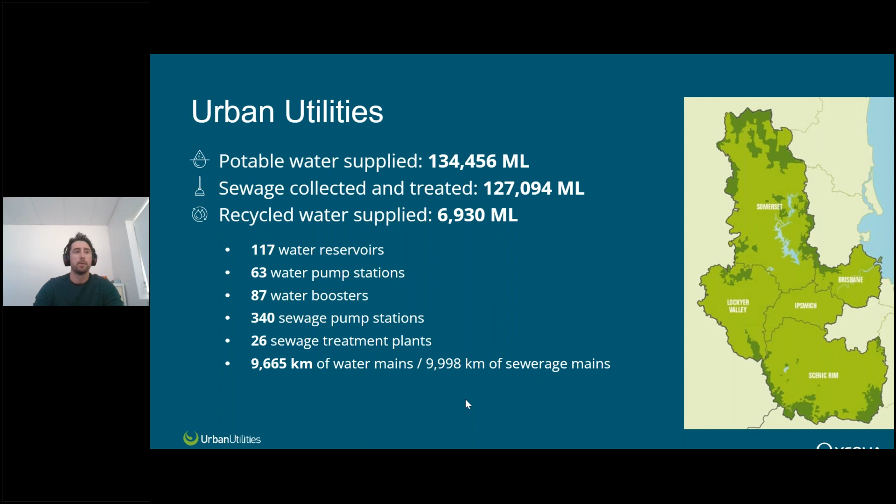As mentioned, with these increased pressures on wastewater utilities to accommodate population growth, there's also always a pursuit of lower nutrient targets to improve our waterways. Therefore, it's better to understand the social and economic impacts that these drivers really have on our customers.

Whilst there are various options to improve effluent targets through capital and operational investments, most of these traditional upgrades really do conflict with the strategy of sustainable treatment due to the increased cost to the customer. So urban utilities has taken the strides to invest and look at alternative strategies, and the one we're speaking about today is AnammoX, which is fantastic.

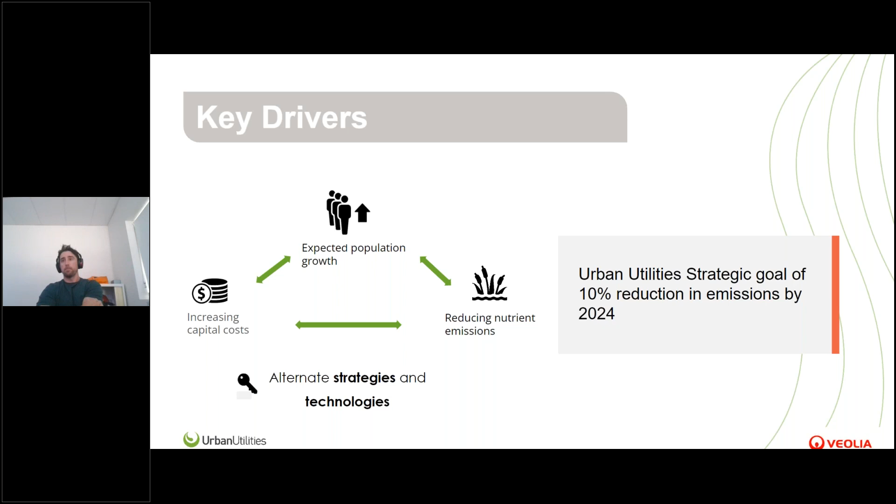Whilst the implementation of the bubble license presents both a risk and an opportunity to achieve greater emission reduction by shifting attention from smaller plants to larger plants, this obviously has a cost benefit with economies of scale. It also does provide a bit of risk.

For example, Luggage Point being such a large plant and contributing such a large amount to the bubble license mass load to the bay, a change of 1 milligram per litre in the TN from that plant is effectively equivalent to about 50 tonnes of nitrogen per year, which is pretty substantial.

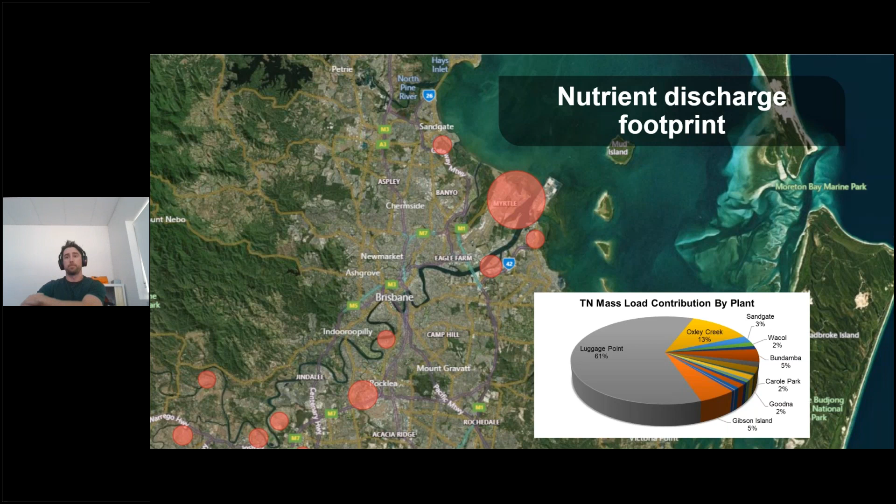This is essentially why urban utilities has focused a lot on this large treatment plant, Luggage Point. It's expected that the population will increase quite substantially. Interestingly, there has been a bit of a bump with COVID, with shifting population and changes in industrial loads to the plant, which is important because you have to become flexible within your treatment options to deal with these kinds of changes.

While there's projected growth, we've done a lot for continual improvement to provide better effluent. A lot of this work ends up becoming diminishing returns—the more you invest, the smaller the change that occurs at the treatment plant. As mentioned, whilst there are options to meet effluent targets through capital and operational investments, most of these options do conflict with our strategy of sustainable treatment, which has that almost certain increase to the customer.

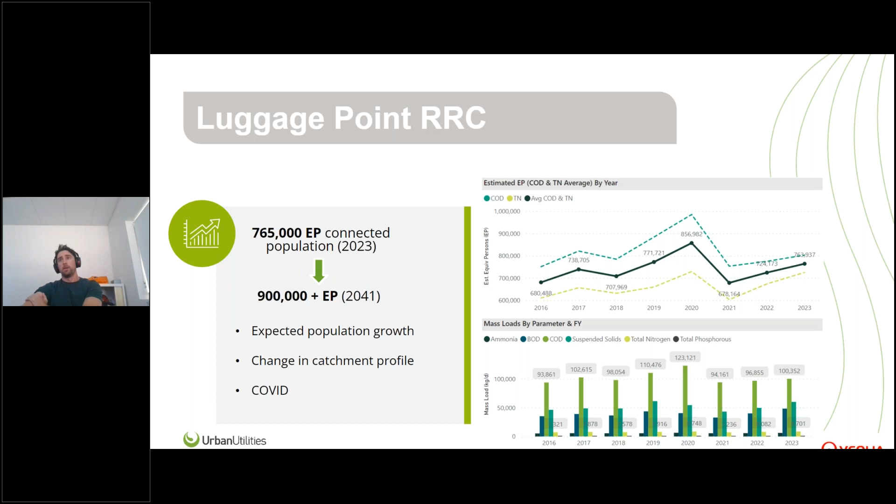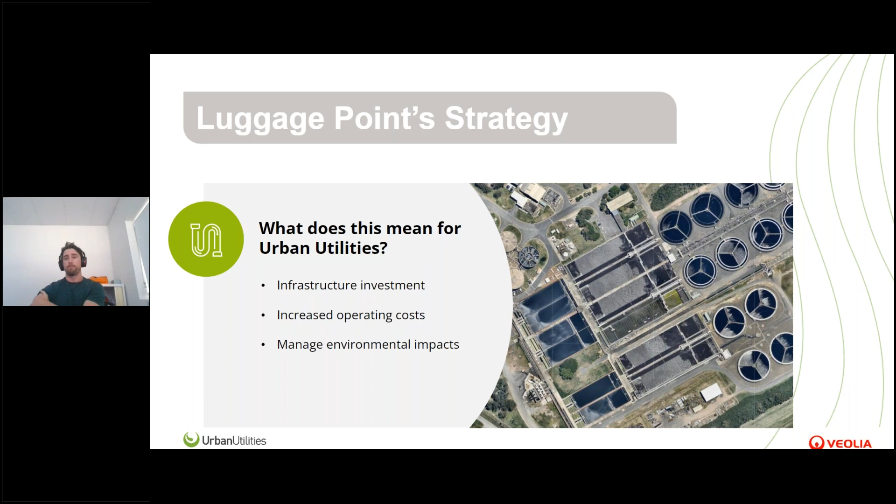So what this means for us is we ultimately have to invest in infrastructure or increase operating costs to manage these environmental impacts.

Just a bit of history, or a summary on Luggage Point: it's our largest treatment plant. We have 6 anaerobic digesters where we redirect carbon towards our digesters. Whilst this provides a lot of benefit in terms of renewable energy on site, it does provide a lot of load back to the head of the plant, equivalent to about 12 to 15% of the plant's return, which means this contributes to a lot of the ethanol, chemical, and air usage within the plant.

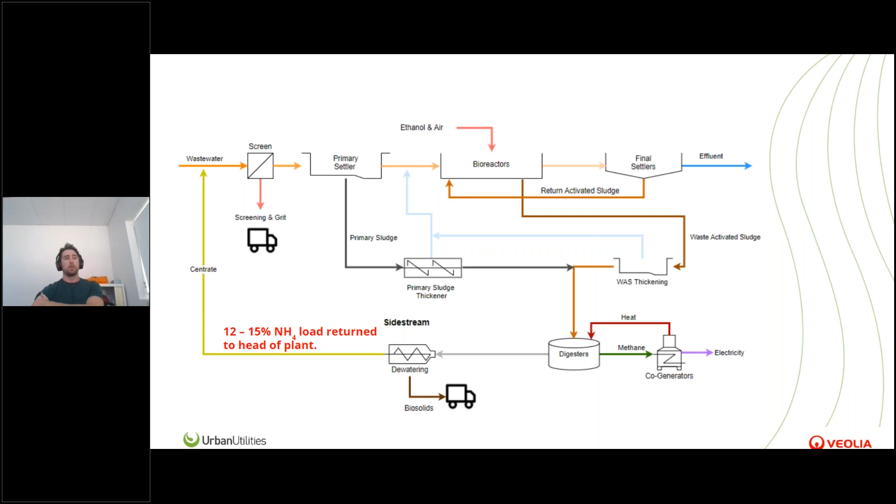And therefore we went along the route of— that's why Urban Utilities started the review, looking at options assessment for reducing this sidestream load to the head of the plant to improve our operational costs.

After several years of testing, we did an options assessment across various different types of AnammoX technologies. Urban Utilities landed with the ANITA Mox technology, which we've been really, really happy with to date. And I'll allow Romain to continue to give a bit more background on the technology and AnammoX itself. Thank you.

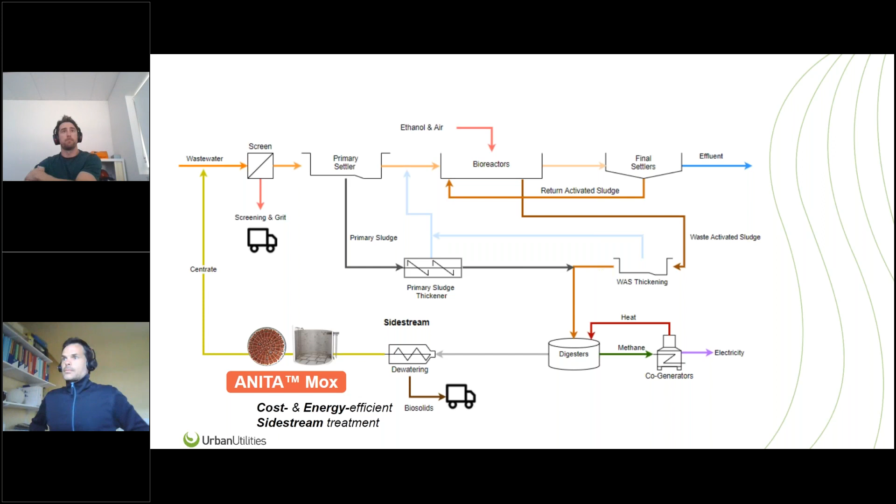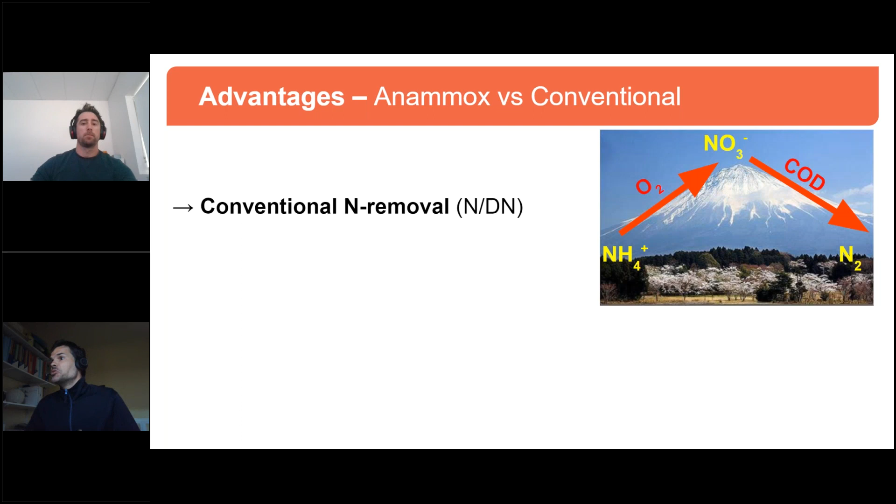When we talk about Anammox versus conventional processes for nitrogen removal, the conventional processes use a lot of oxygen to oxidize ammonia to nitrate, and then a lot of COD to denitrify. So that's a big mountain.

When we look at Anammox, the mountain is not as high, a bit like Uluru in Australia, because we need less oxygen—we can save 60% of the oxygen, since we don't need to oxidize all the ammonia into nitrate anymore. We just stop at nitrite, and only for 50% of the ammonia. With the remaining ammonia, the Anammox bacteria can remove everything to nitrogen gas, no carbon needed. So less oxygen and no carbon required, which is great for sidestream treatment from anaerobic digestion.

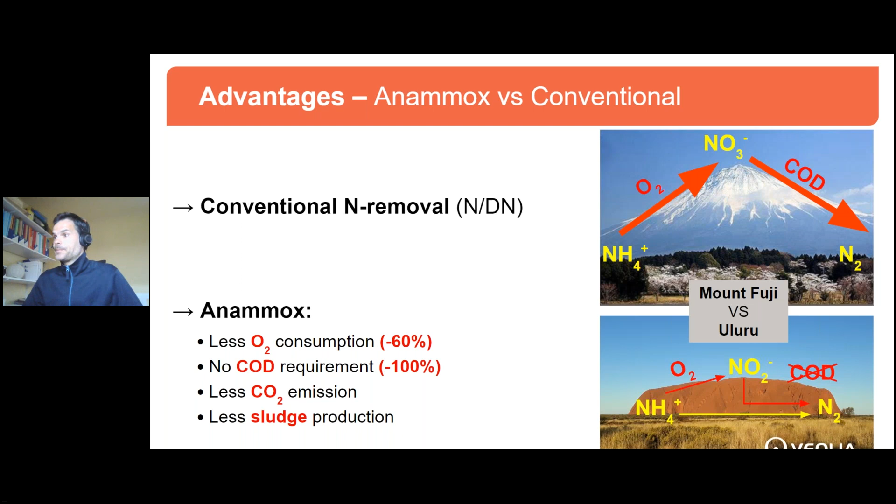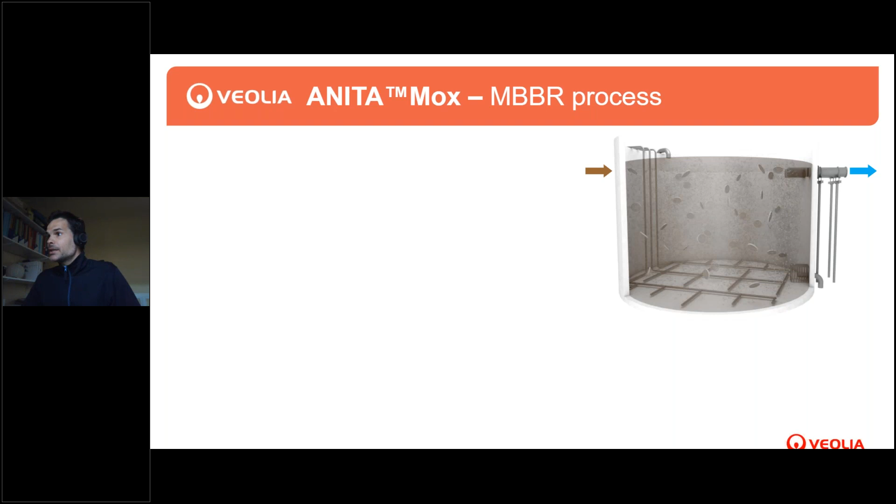Next, please. The process itself is based on MBBR, moving bed biofilm reactor. In these processes it's quite simple: we have a tank, we have carrier media to support the biofilm—the Anammox in our case, and a nitrifier, both populations. You see a blown-up picture there, with the media and the biofilm.

We apply an oxygen level which penetrates into the biofilm, but not fully. So we create two zones in the biofilm simultaneously: an aerobic zone on the outskirts of the biofilm, and an anoxic zone deep inside.

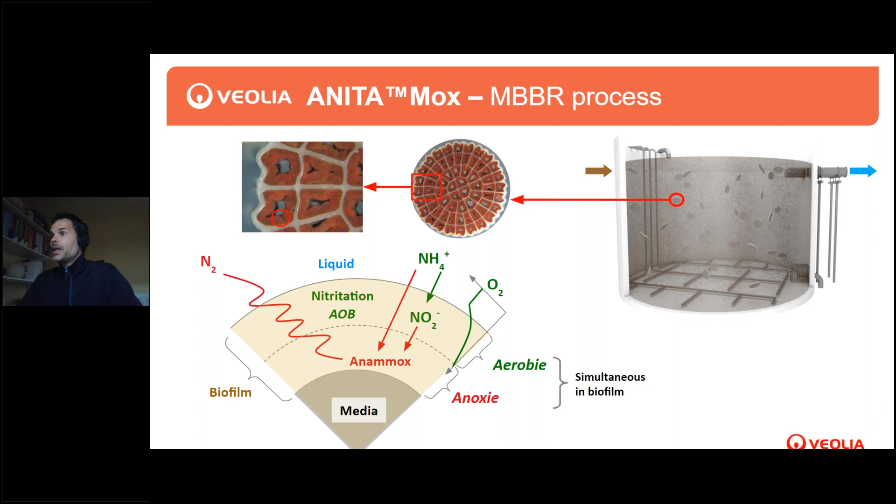That makes the bugs locate themselves automatically. The nitrifiers will be on the outskirts where oxygen is available—they nitrify the ammonia to nitrite, and this nitrite then diffuses deeper into the biofilm layer to the Anammox. The Anammox don't like oxygen, so they sit well below the nitrifiers. They then remove the remaining ammonia and the nitrite produced by the nitrifiers, achieving full denitrification and ammonia removal. That's the principle, and that's actually what happens in reality in the ANITAMOX.

So looking at the process itself, basically we have one tank, very simple—flow coming in, flow going out. In the case of Luggage Point, there is even no buffer tank after the centrifuge; it goes directly into the tank. Usually we do have a bit of an EQ tank to equalize based on the dewatering operation on site. But it's flow in, flow out, no decantation, no settling of the biomass.

Everything is attached on the media. To get the ANAMOX, which are slow growers, to retain in the system, we just rely on a physical barrier—for MBBR, a grid with little holes so the water can go through, but not the media with the prime ANAMOX bacteria on it.

So it's pure 100% retention capacity of all these bacteria with the MBBR. You can see in the photo that all the media are on the grid, and there is no way it can leave the system.

So there's no risk of losing the Anammox biomass with this MBBR configuration. Also, quite important, there's no impact from incoming TSS, because we all know centrifuges can go berserk sometimes in operation. That's the reality—if you get a big surge of MLSS or TSS coming in, it will come out by itself and won't impact the system too much.

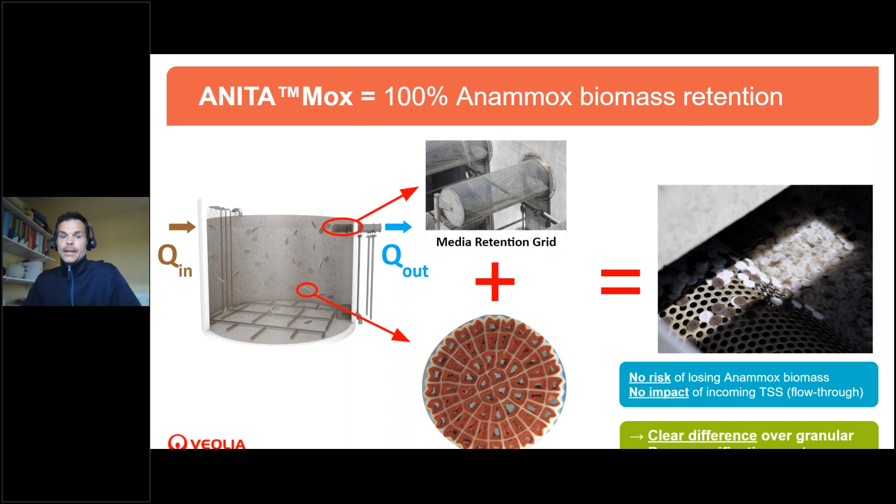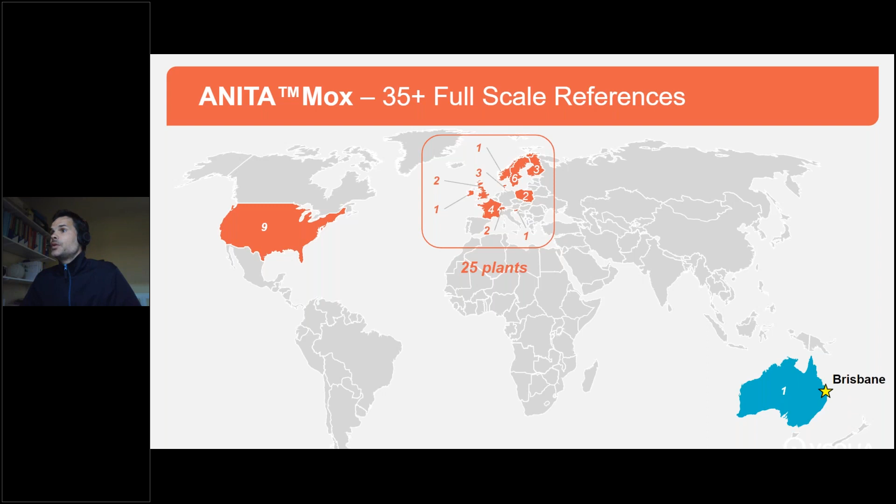In terms of references for ANITAMOX so far, we're a bit over 35 today. Most of them are located in Europe, as you can see, spread between Scandinavia, France, the UK, Poland, Switzerland, Slovenia, Ireland, Denmark, and Norway as well. We also have a few in the US—on the ANAMOX market, the US has been moving for quite a while now. And you can see that we're really proud to have one on the other side of the world, in Australia, in Brisbane. So that's the map at the moment for reference.

We started pretty much with the first one in 2010. So it's been a bit more than 10 years that the ANITAMOX has been successfully implemented worldwide.

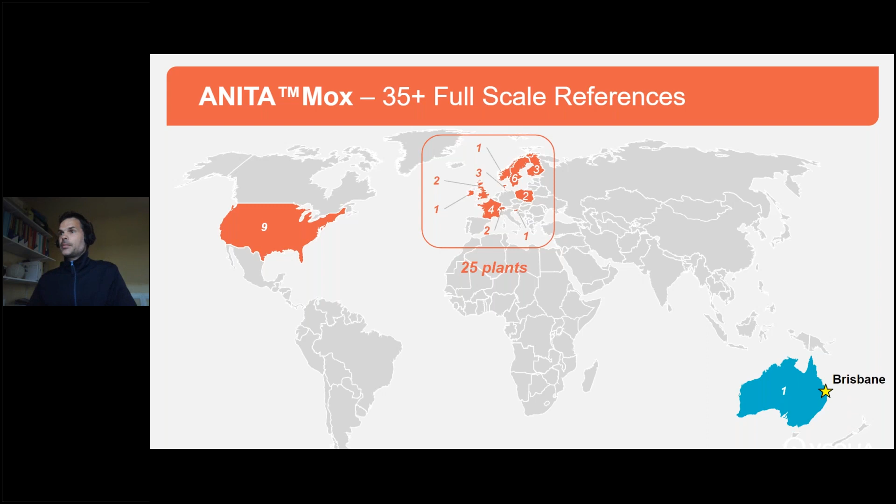So I will show you a few examples of our references. The first one is in Denver, in the US. I picked that one because it's the largest ANITAMOX we have today, a very big plant in Denver, almost 2 million PE. It started in 2017 for the ANITAMOX, and we've just been reusing existing tanks. That's a good feature of the MBBR configuration: we can pretty much reuse whatever volume is available. That's what happened at Luggage Point as well. They had, as you see at the bottom, 3 tanks that could be reused, not really being used at the moment in Denver, and we put the ANITAMOX in there.

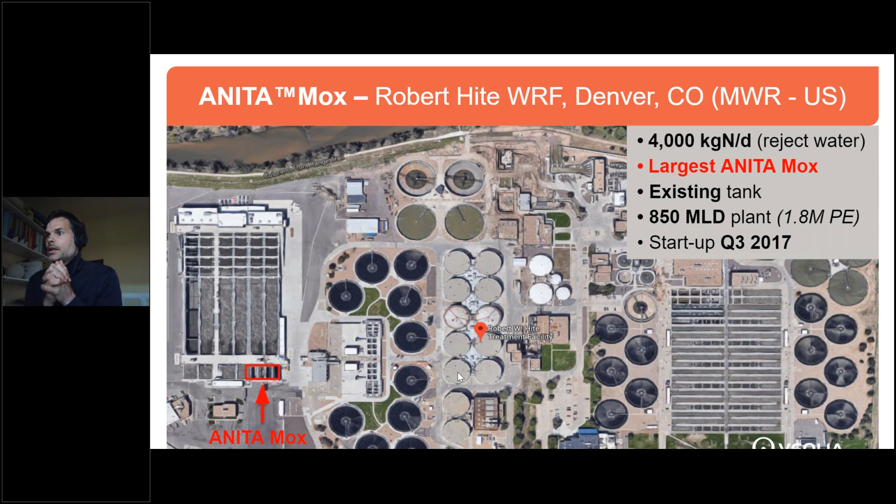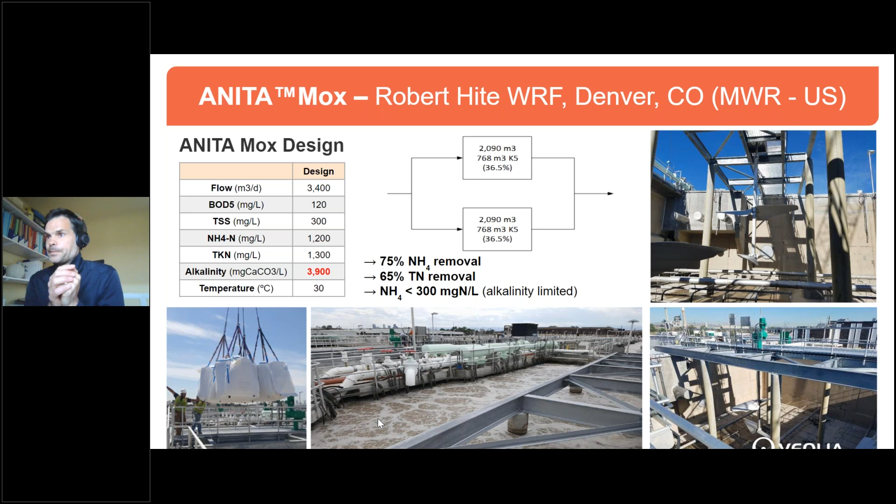So that shows you the startup period and the performance. We started this big plant with only 5% seed media. Usually when we start an ANITAMOX we put a bit of media with Anammox bacteria already on it, and the rest is virgin media. In the case of Denver, due to its size, we just put 5% seeded media at T0 when we started, and it took around 3 months to reach the design rate and even go above 4 tons of ammonia removal per day. So the startup was pretty quick, the colonization of new media and the ramp up, and it's been achieving above the design rate for quite a long time now, with a removal lower than the usual 80 to 90% ammonia removal, again due to the alkalinity limitation in the centrate.

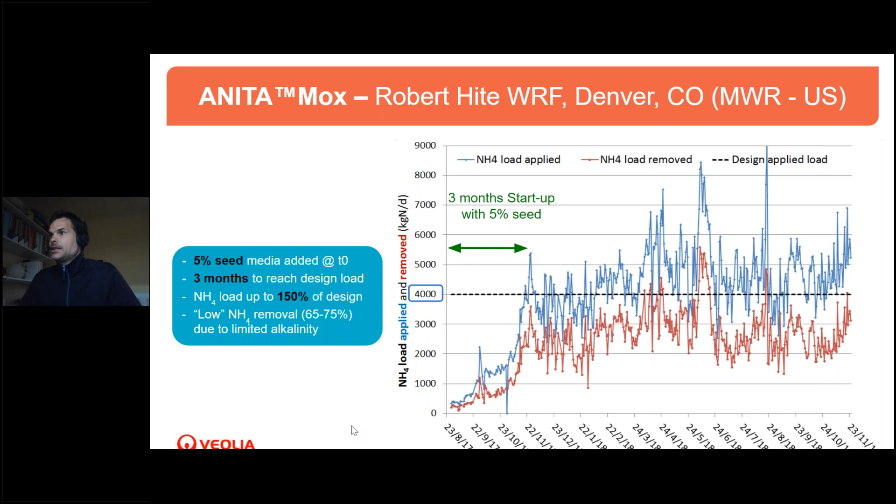Next slide, please. Another example is a plant we recently... one before, or maybe we can skip that one, which is the timing. You're right.

If we move to the IFAS configuration, that's when we deal with THP, thermal hydrolysis processes. We have to change the configuration a bit, and we learned that over time. Instead of being a pure MBBR system, we put a settler at the back end and recirculate some of the sludge, making it an IFAS hybrid system. The Anammox are on the media, while the rest, especially the nitrifiers, are in the bulk and not on the media anymore. This is the best configuration to deal with THP centrate after thermal hydrolysis, because it creates a centrate which is a bit more toxic, with some toxicity in there, so we handle the system better with this configuration.

If you look at the references on THP, we have 5 up and running ANITAMOX plants, in Sweden, Denmark, the UK, France, and Ireland, and we have 3 ready to be started very soon in Slovenia, and 2 big ones in the US. We at Veolia have been the first with ANITAMOX to treat THP, back in 2014 in Sweden. We have 8 projects so far and 5 in operation. Also at Veolia, we have our own THP processes, so we know very well both THP and Anammox. We are gathering the two expertises to provide, I'd say, the best design based on the THP centrate you can have on site.

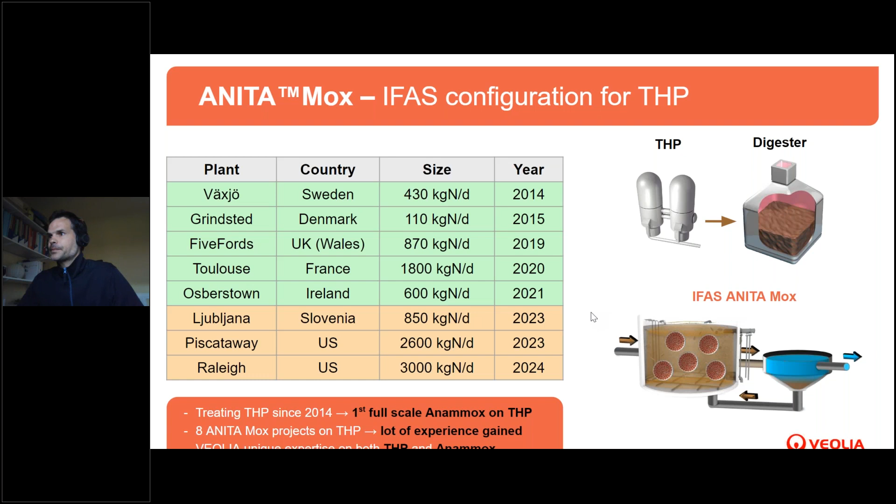What we've learned with THP, and I'll show you an example in a minute, is that it can be a bit more difficult, so over the years we developed a dedicated digital control system, an advanced control system dedicated to the AnitaMox. The challenge is we know we have slow growers with the ANAMOX, complex interactions between microorganisms - the nitrifier, the ANAMOX, some heterotrophs if there's COD available - and centrate variability, especially with THP, with features of toxicity and sometimes higher VFA or COD. This pushed us to develop this advanced control system.

The solution is based on a web platform. We look online at all the sensors and instrumentation, and provide an optimum set point for aeration. Another feature is the load to the AnitaMox - we look at the level in the buffer tank and adjust the load based on how much centrate is available and the system's performance. It's called Hubgrade, and the benefit for the operator is optimized aeration at all times, and optimized, stable load based on conditions - peace of mind and time and cost savings for the operator. That's why we developed it, to secure long-term operation of the system.

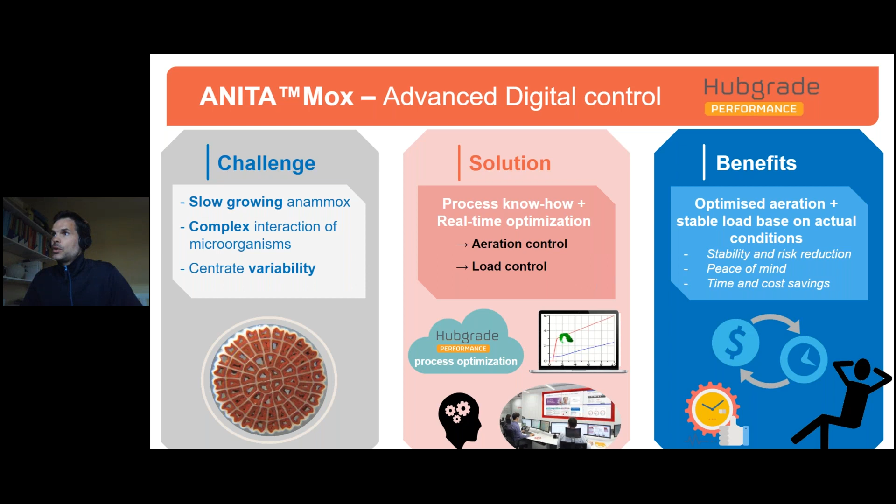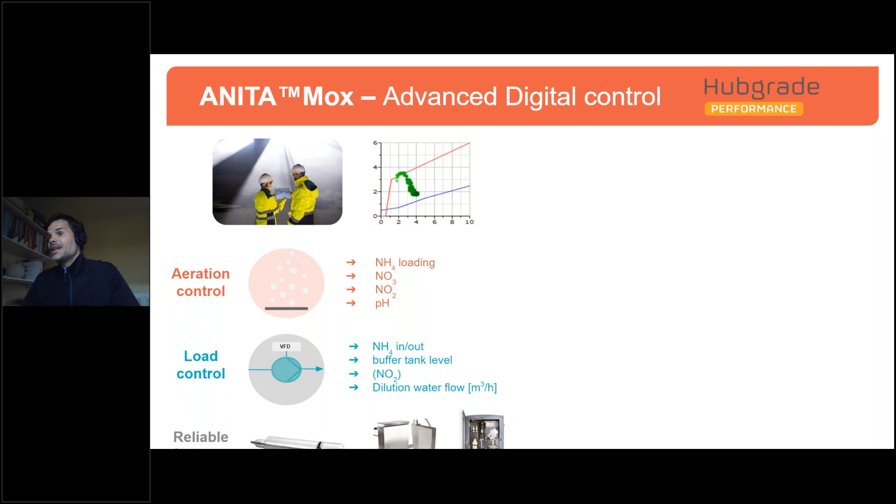Here's an example of the two main features, starting with aeration control. It's based on reliable instrumentation - probably cut off a bit at the bottom of the slide, but you'll recognize some of those sensors. We use ammonia, nitrate, pH, DO, and we now also have reliable nitrite, NO2 sensors available, which helps control the aeration.

For the load, we use the level sensor in the buffer tank to better adjust the feed. And when we have THP, we can also use this feature to optimize the dilution water we need to add to make sure it's not toxic for the system.

The system doesn't impact the plant's SCADA. The operator can always decide to run or not with the Hubgrade feature, because Hubgrade just communicates through an OPC server to the site PLC, reading data from the PLC and all the sensor information, making its own adjustments and optimization, then pushing back an optimum set point for the feed and aeration. If the operator wants to stop, they just press a button and go back to their default set point if they want.

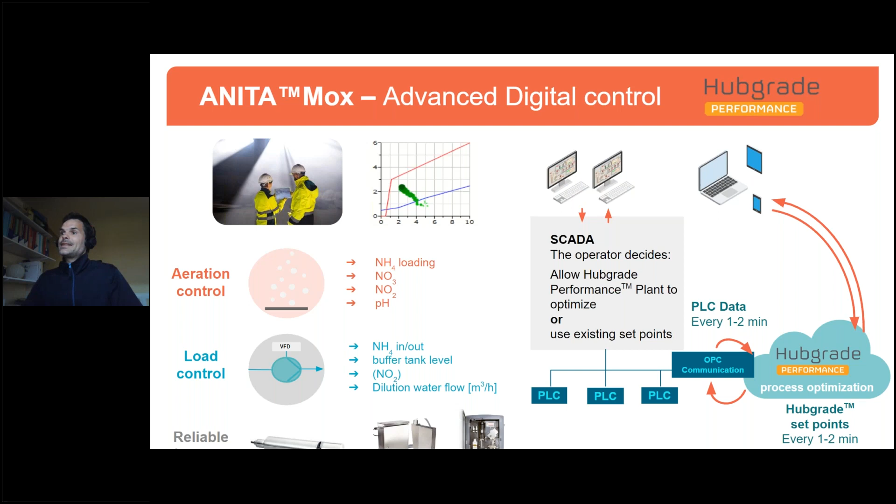Five Fords was one of our first THP plants in the UK - the first AnitaMox in the UK, which is a big market for THP, with a lot of big THP plants over there. We started this plant in 2019, and included Hubgrade not at startup, but after a year of operation. I'll show you why in a minute.

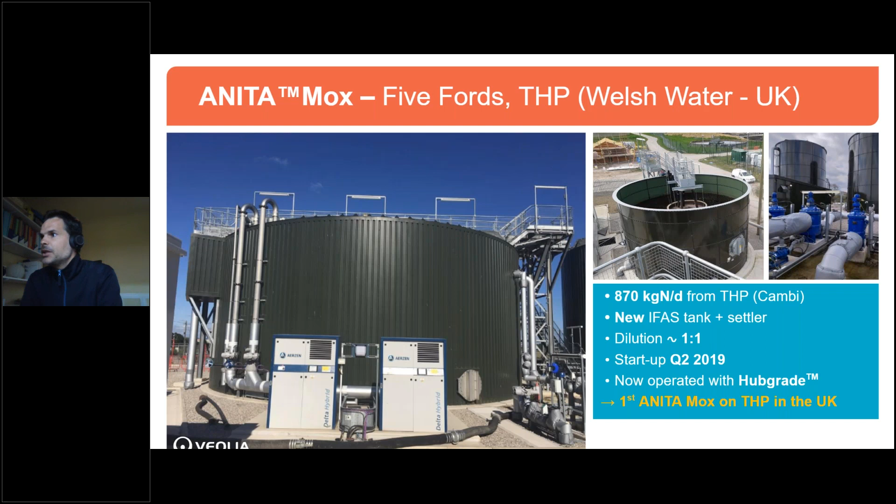Since we've been treating all the centrate, it's been pretty much stable, and we're pretty close to, or sometimes over, the design load for this plant.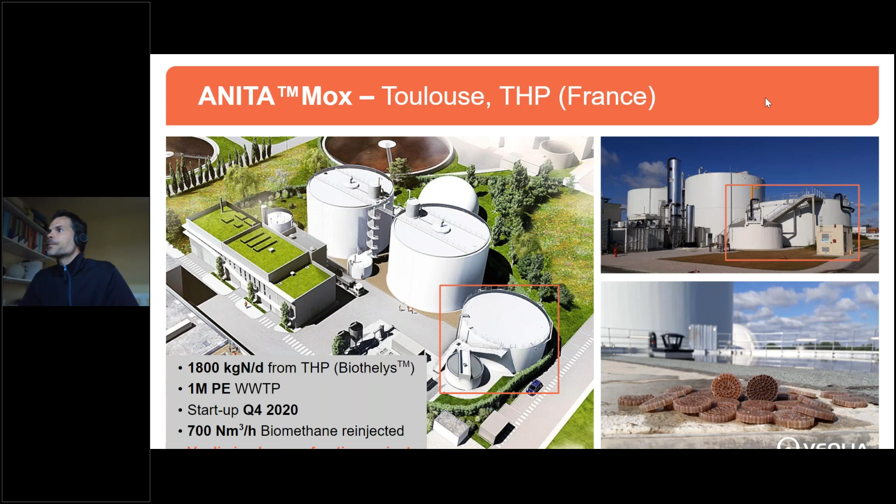So the plant now has been handed to the client, and it's been running since then. So it's okay for my part. I will then let Justin conclude with the example of Luggage Point.

Cool, thank you very much, Romain. Look, I just want to give a bit of a brief journey before we share any results around the operation of the full-scale plant, because I think it's really important to share the journey, because it's been a fantastic one.

As we're aware, it's pretty evident that Anammox, or ANITA Mox, has been successfully applied and operated over the world to treat high-strength ammonia wastewater. There's probably more than 110 full-scale installations worldwide now, which is pretty impressive. We know that the successful and timely implementation of these full-scale operations is really attributed to having sufficient biomass.

But unfortunately for us, being in Australia with strict quarantine regulations, we weren't able to import any of this biomass into Australia. So we had to start our own journey to grow up the bacteria to see the full-scale implementation. To do this, we had several scale-up enrichment processes, which I'm going to share in a second.

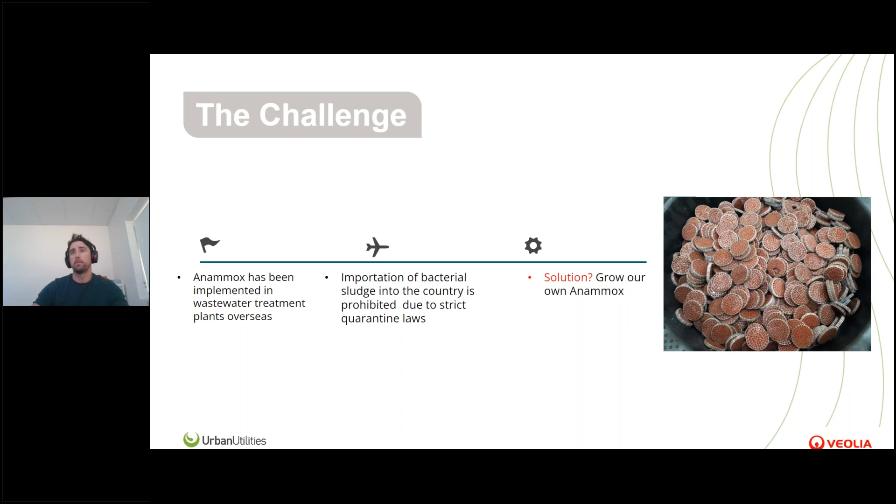The journey actually started back in 2011, before my time at Urban Utilities. This was a partnership with the University of Queensland, creating that initial seed stock. This was one of the first research facilities or projects that came into the Innovation Centre, a dedicated research facility which has now grown substantially, hosting local, national and international projects to the value of over $20 million, which is pretty impressive. Always have to give props to the Innovation Centre, because this is basically where the journey began.

The team in and around the Innovation Centre has been so supportive for this project, which really made it happen. Unable to import the bacteria into Australia, Urban Utilities, Veolia, and UQ started growing up this initial biomass. It actually started from a 10-litre jar of laboratory-grown Anammox, and gradually over the years we built this up to inoculate that full-scale installation.

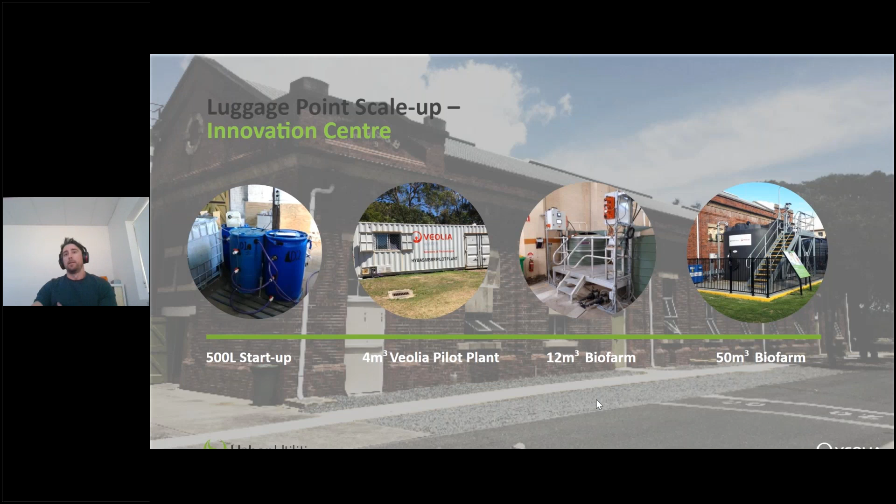So from humble beginnings comes big things. We really started at the bare basics—just had a couple of water tanks. It was pretty agricultural in the Innovation Centre, where we just had basic control of pH, temperature, and DO control. We relied heavily on operators and staff to really make sure we had the information from these tanks to provide some kind of guidance to direct what we needed to do or respond to different events that happened.

We definitely threw everything including the kitchen sink at this thing, because at the time we were also doing a centrifuge upgrade, so we're getting high polymer, high TSS, absolutely everything. It was actually really good to be able to do it in this kind of space with very basic control, to learn the best way of dealing with these problems. It also gave us a lot of confidence around the robustness of this technology, which is one of the main reasons why we decided to go with it.

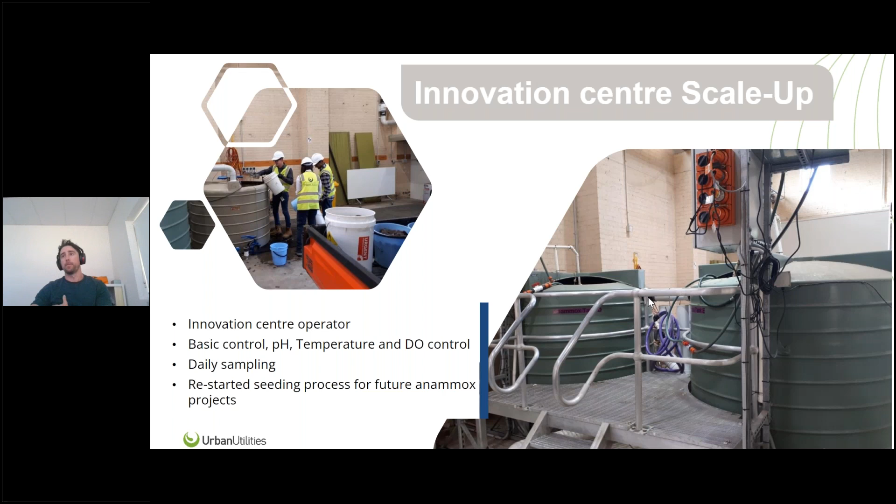One of the final steps in this inoculation or enrichment period—in partnership with Veolia—we built a 50 cube tank, which we reseeded from the previous water tanks. This was actually the first time using this tank where we didn't run heating, which gave some pretty good learnings, because considering the size, there was definitely a lot of fluctuation in temperature between summer and winter, which provided really good confidence that the technology was going to work at full scale without heating.

We use this facility as a training facility as well, upskilling the operators and building that real confidence in technology for the people backing it. We had a great time trying to implement smarts from our previous installation, because this was the first time we had some automation, so it was good to learn more before designing the full scale treatment.

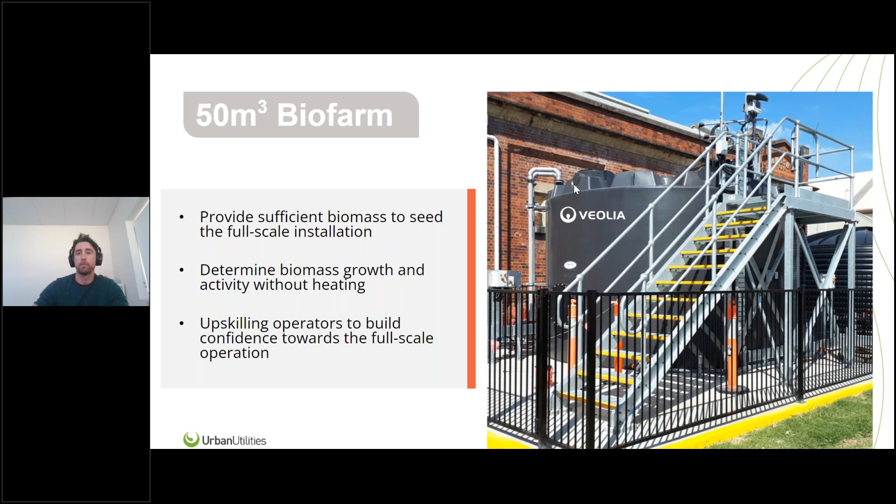The objective of the full scale treatment plant was to provide a low cost upgrade solution for the plant to accommodate the new full scale sidestream treatment process. This was achieved by repurposing 4 unused pre-aeration tanks, which required an innovative design to overcome hydraulic limitations due to the shape and configuration of the tank, without the aid of mechanical mixing. Veolia did a fantastic job providing the technical expertise to retrofit these tanks.

The final solution required altering these tanks to operate in series, consisting of 2 hydraulically connected compartments. This provided a massive benefit for us, because this configuration improved our seeding process - we only needed to seed the front tanks, since the biomass would slough off and move into the back tanks before the effluent. So it meant we only needed 5% seeding, and it was a really easy process to seed and grow up. It was great.

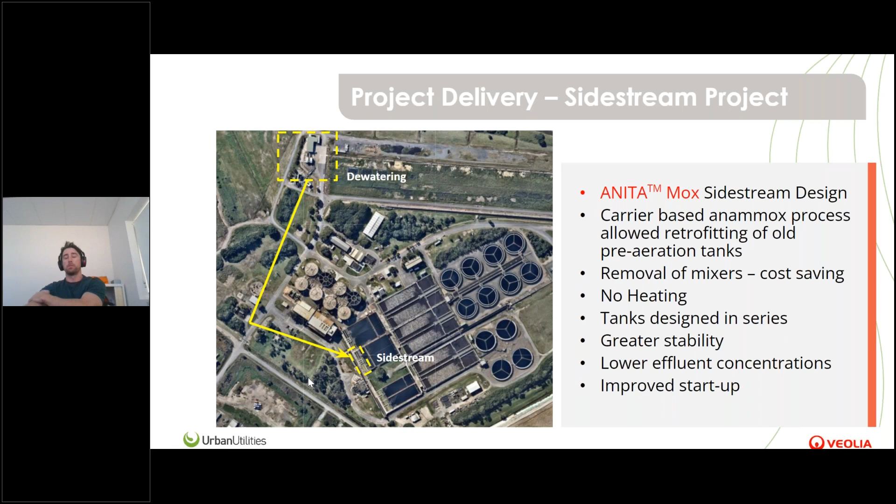The program was assigned in 2019. I think it was one of the fastest projects we got through, which was really impressive. We later commissioned and installed the ANITA MOX carriers with final seeding of the biomass in January 2021. So it's been a bit over 2 years since installation, and it's still going strong.

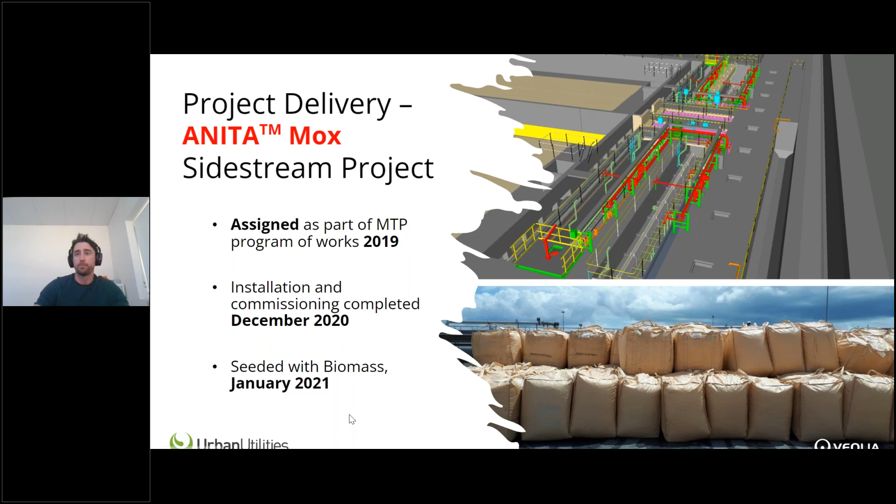We'll skip through a couple of these. This is the retrofitting of the tanks - you can see the length of the tanks is quite long, so there were definitely hydraulic restraints and challenges to retrofit these tanks. But as I said, Veolia did a fantastic job providing that technical expertise, and it's working really well.

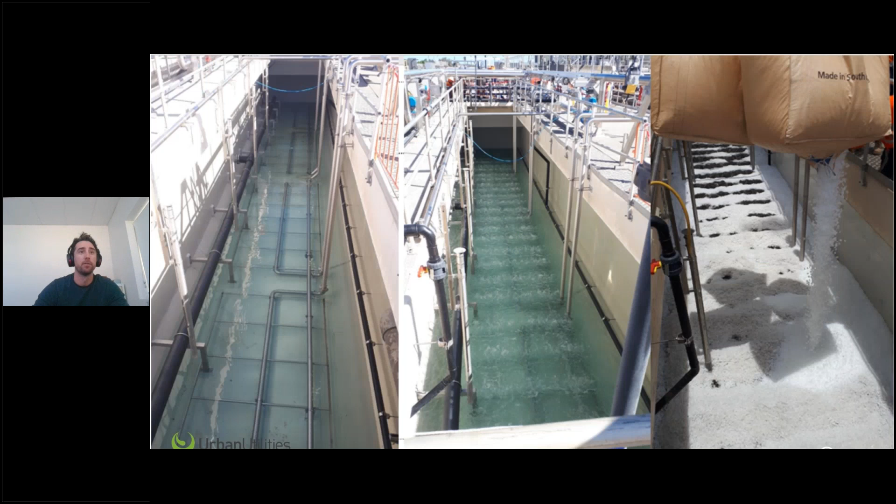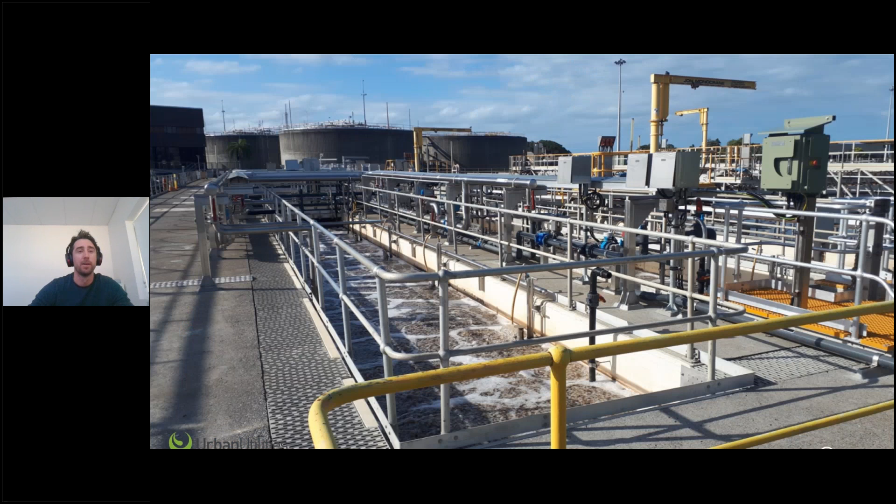This is when we seeded, added the carriers, for the initial commissioning, which was such good fun - a really good process. We can probably move through the next couple. Everyone was obviously made pretty happy, and that's the final installation there, probably June, July 2021. With the carriers you can see there's a bit of growth happening - it's fully seeded now and operational. It's been fantastic.

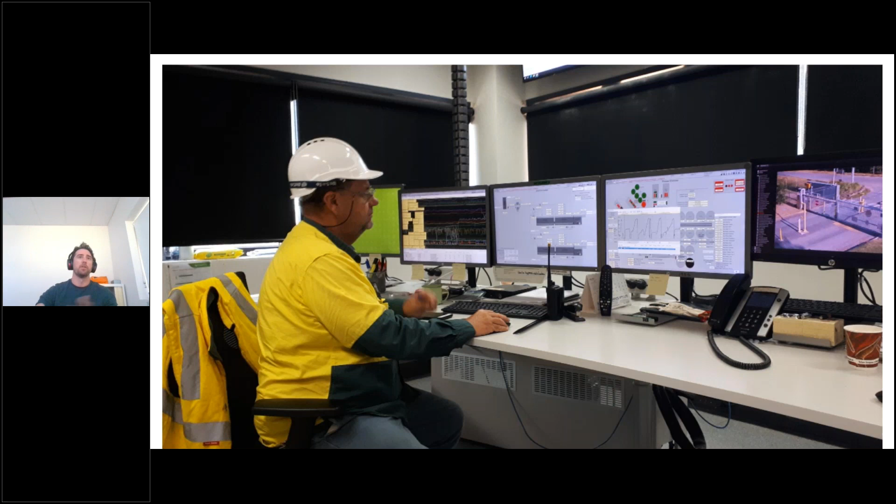I'll just talk a bit on this slide. Got to give a shout out to the operators, because this is new technology, and we really had to bring the operators along on the journey to understand the new system, the optimization, and the key drivers. This is one of our first operators to really look at the technology and work with me to understand how to operate it. They've done a really good job taking up this technology and trying to learn and make it work, so a big thank you to them - they've been pretty good.

The initial design and expectation for the ANITA MOX plant was to treat about 820 kilograms of nitrogen per day. The total reactor volume was around 1,000 cubic meters with about a 50% carrier loading rate. The initial expectation was that we would see about $500,000 in savings through reduction in ethanol and aeration savings. The other benefit now is that we've reseeded the biofarm, which we can provide as seed to other utilities if required for the same process we went through.

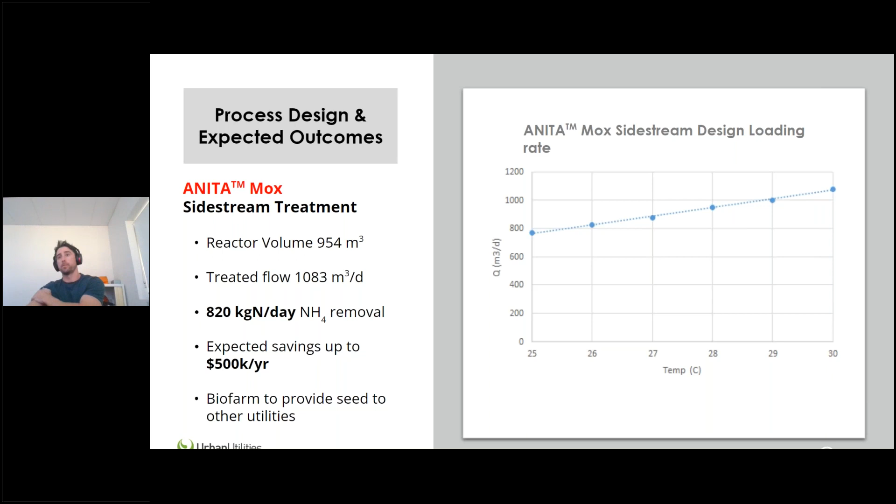So the initial expected timeframes, based on conversations with Veolia and other plants around the world, was really within that 3 to 6 month range based on previous experience. We did have a bit of issues, there was a hydraulic limitation within the plant itself which restricted the flows for the first 4 months after seeding.

But you can see it entered that exponential phase, which we expected to see in line with other plants around the world. It wasn't until about 250 days that the hydraulic limitation was fixed, and it enabled us to reach the design treatment capacity. It basically happened within a couple of weeks, so you can see the biomass was there, it was just waiting for the food.

So the full-scale implementation now treats successfully over 1,000 cubic meters per day, which is really impressive because this is above the design expectation, and exceeding the removal rates where we're consistently seeing 85 to 95% removal of ammonium through the process. With flows coming in around 1,000 to 1,100 milligrams per litre, it equates to a load rate of over 1,000 kilograms a day, where this was designed to do 820.

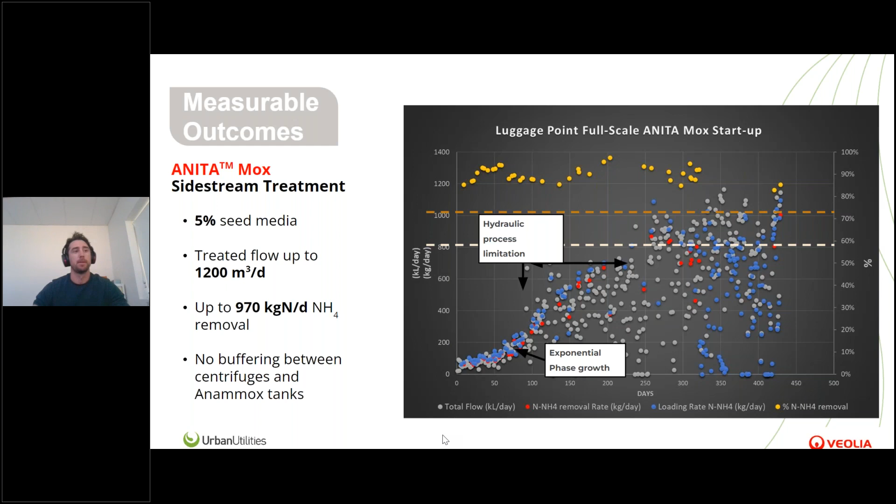This is just a really good demonstration to show that the timeframe lines up with that exponential phase, so it was as expected. It was really good that we were able to see those similar timeframes with about a 5% seed.

So this is actually a really cool slide, because the blue is our TN results from the plant, and the orange is actually the ethanol. We weren't expecting this, but we've been absolutely stoked that we've been able to remove all ethanol from the plant and yet still achieve a large reduction in TN. I think it's about equivalent to a 60 ton reduction without any ethanol dosing, which is fantastic.

This is giving us an economic benefit of easily over $500,000 per year, so it's obviously gone above our expectation, which is awesome.

It also gives us additional capacity within the plant, and when you talk about capital upgrades and deferral, it adds up to be quite a significant amount when you're looking at the cost of building additional bioreactors. So it's definitely gone above and beyond what we expected, and the results have been really great to date, and we're seeing quite a good benefit.

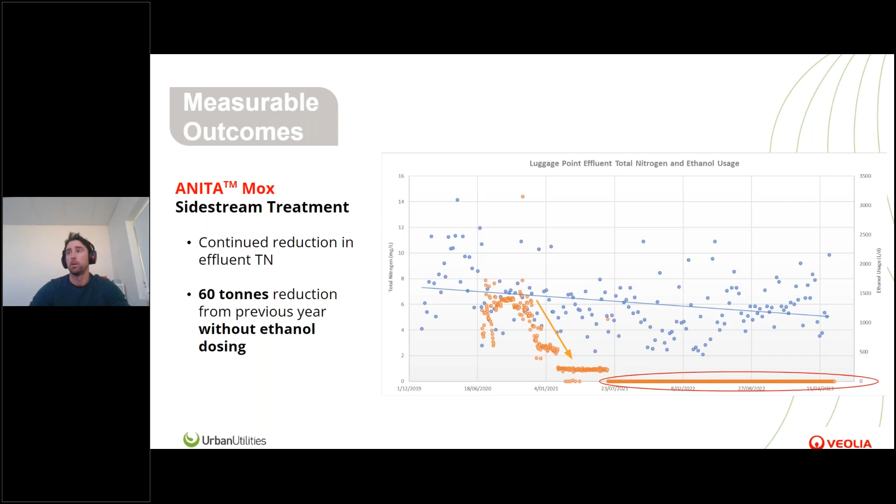So what's in it for us for the future? We're actually still looking at a lot of things to do with AnammoX. We're looking at mainstream AnammoX through the Innovation Centre, and also looking at utilising additional assets to generate revenue through co-digestion and importation of high-strength nitrogen. We've still got capacity within the AnammoX treatment plant, so we're looking to utilise that efficient pathway to remove nitrogen, to benefit and get additional revenue to support what we do.

There are other options for us to expand within other STPs, so Oxley is the next one. We have a THP unit there, and as demonstrated by Romain, the technology works quite well. We were the first to demonstrate it on THP, so we have confidence that we'd be able to implement it at Oxley as well, which is great.

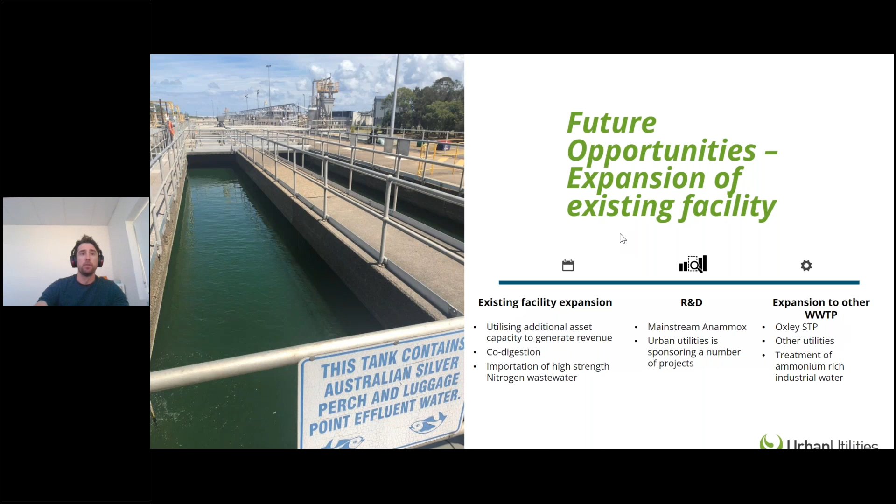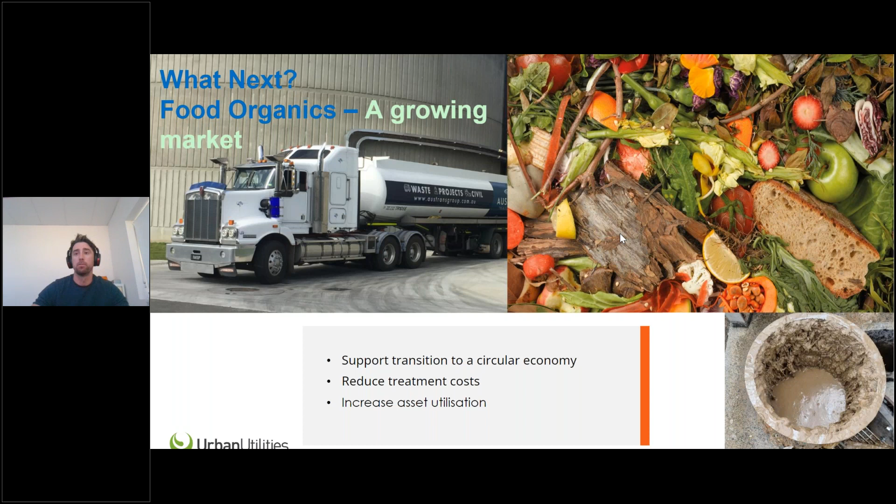One of the things I'll touch on quickly, if anyone's had a look at it, the National Waste Policy from 2019, it's expected that we'll start to see a lot of these organics shift to treatment plants. A lot of these will cause changes and drive demand changes within our treatment plants for extra infrastructure, tanks, equipment etc. And we've actually started to commence this.

As part of this, we've started to commence importation of organics, which now represents about a 10 to 20% increase in digester utilisation. This benefit reduces the cost if we can bring in that additional revenue, but it ultimately, by increasing gas flows, also increases the side stream.

This is where the AnammoX process comes in - you want to bring those organics in, they break down and provide more load through the side stream. But if you're providing that load to the most efficient biological process we have in wastewater for nutrient removal, AnammoX or ANITAMOX is the way to go to provide really good economics for bringing those organics in.

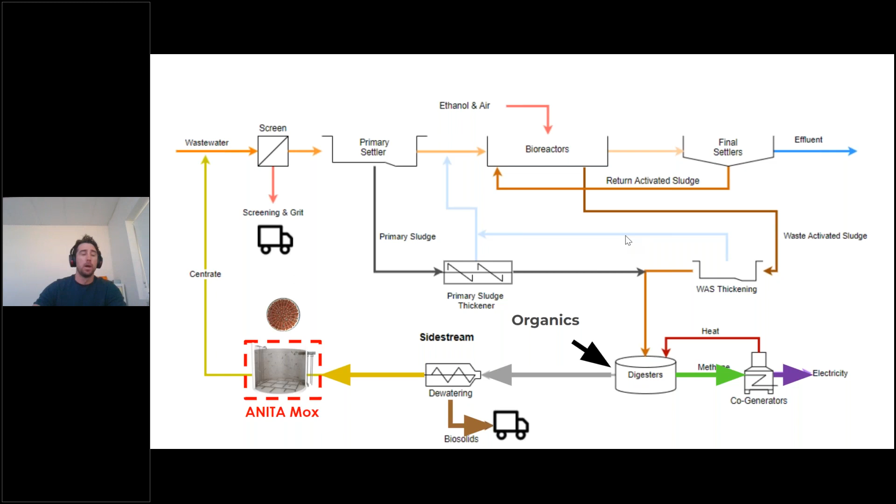The other really neat thing we've started to pursue is importation of high-strength industrial wastewater. As I mentioned, we haven't found the hydraulic or mass load limit to the Anammox, or ANITA MOX, plant yet. So we're looking at different types of contaminated groundwater. This is one we've done recently over the last year, where we're bringing in about 10 grams per litre of contaminated ammonium wastewater, adding it to our centrate or sidestream return to look at various inhibitions and loading capacities of the Anammox plant.

Based on some of the work we've been doing with this, we're developing a business case to bring in this additional high strength wastewater, which will then be treated through the ANITA Mox process as well. It's really opening up doors for us for different sources of revenue, and also providing a really good service to various customers within Southeast Queensland.

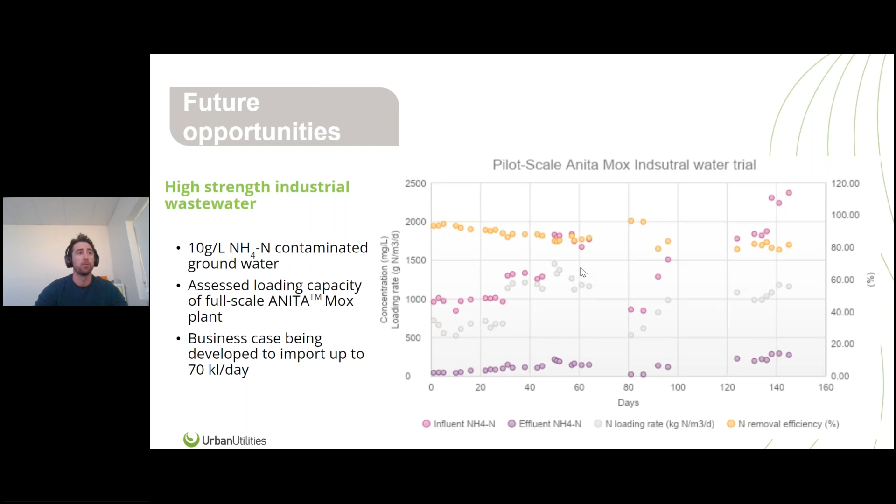Finally, I'd just like to thank everyone that's been a part of this project. It's expanded over 12, 13 years. In particular, the research and development team with the Innovation Centre, and the Luggage Point operating teams - we wouldn't be able to operate and run the plant without their support. The infrastructure delivery and procurement teams have been involved in the balance of plant design with Veolia. And finally, Veolia Water Technologies has been an absolute awesome partner to work with, really supportive, really easy to contact and get guidance where we required it. So it's been a really good journey for all of us, and I'd just like to say thank you very much.

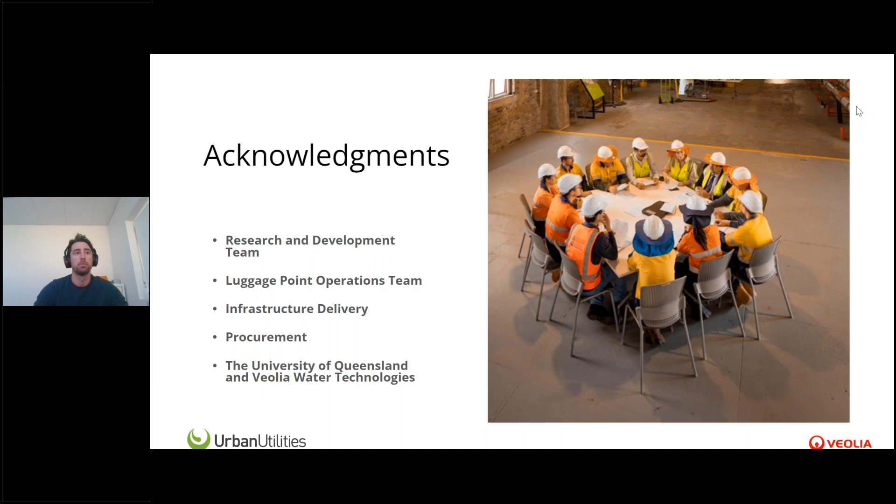The first question is about Luggage Point being a biofarm, and how much seed would be available to take from the Luggage Point plant to seed another plant in Australia. And if you are a biofarm, what would you anticipate to happen in the plant if you take out seed? How do you expect the plant to react?

Sure, do you want me to answer that one? Yeah, so we actually have the ability to take from our main plant and also the biofarm. We've got a 50 cube biofarm, which has a 50% carrier loading volume, so there's about 25 cubic meters of freshly seeded ANITA Mox carriers. We've demonstrated it's quite easy to seed a 1,000 cubic meter plant, which is pretty substantial in size for treating. I wouldn't expect there to be too many larger plants within Australia that wouldn't be able to start their process with that amount. But there's also the addition of the main plant as well - there's 487 cubic meters of seeded carriers there, and we'd be fairly confident that you could at least take out 10% of those carriers without seeing any drastic changes to loading rates in the plant itself.